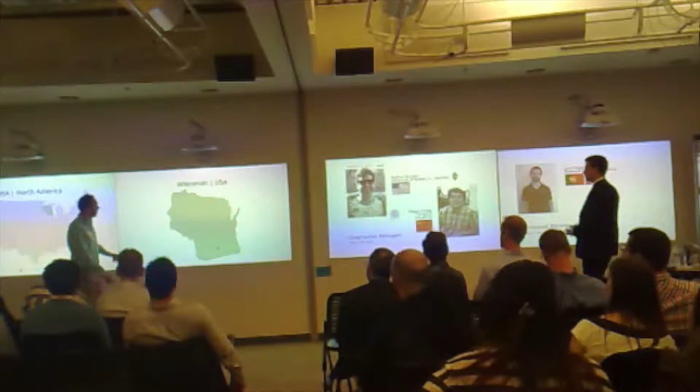So a few words about our site. It's located in the Midwest part of the US, in Wisconsin, in the city of Madison, which is also the capital city of the state. More specifically within Madison, the site is located on the north side of the University of Wisconsin's campus on the south shore of Lake Mendota.

Getting into more detail, we saw that from all 4 directions, there's something unique about our site. From the west, we have the Lakeshore Path. The north, we have the picturesque Lake Mendota. From the east, we have the waterfront, including the Memorial Union Terrace. And from the south, we have Muir Woods, the Hill, and College Library.

Bryce? Bryce, you there? Can everybody hear me? Yes. All right, sorry, I lost internet.

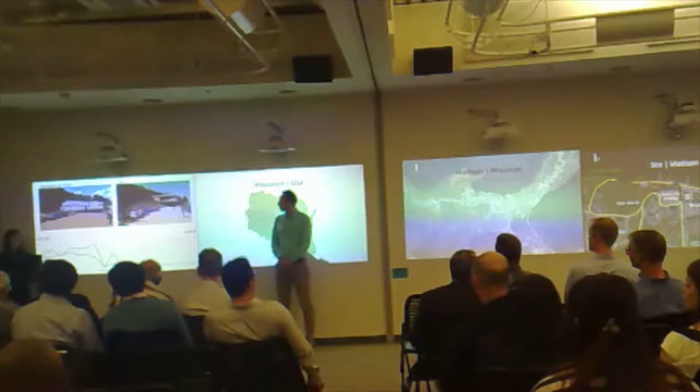Okay, so as a team, we've had an interesting road to our final product, to say the least. Although 7 different building designs and countless iterations of floor plans are a good measure of the amount of work that we have produced, they are not good measures of team process and growth. When looking at the communication history of our group, we saw a very unique correlation between the amount of communication and the quality of our design.

The first design, Containers of Power, was one that we came up with at the kickoff, but was strictly an architectural idea in which we were thinking about sustainable design. This idea was quickly dismissed when we tried to fit the program within the restricted size of shipping containers and had no chance of working.

Next was the Cave, and as you can see from the timeline, our communication was at an all-time low. This is because we were simply working in our silos and communicating privately within disciplines rather than publicly across disciplines. It was a produce and react rather than a collaborate throughout. A couple more iterations in this space, and we finally realized that we needed to change. So midway through the quarter, we had a pivot.

We conducted a brainstorming session with our team and came up with a collective decision to use transition as our next big idea. In this design, we really wanted to achieve transition throughout all disciplines. Examples included a transitioning facade, a hybrid steel timber structure, innovative MEP systems, and a proactive construction process rather than a reactive one. As you can see, our communication was at an all-time high. This was a great step in the right direction, but again, we wanted to achieve more.

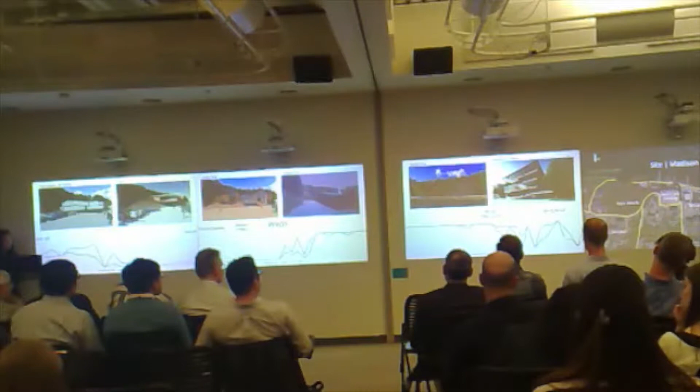Because of its popularity in the earlier stages of the class and its inherent integration characteristic, we decided to start over with Shan Shui. This integrated building design is what we are proposing today and was produced in what we feel was a fully transparent and collaborative cyber working environment.

So we wanted to go back to our site real quick because we have a lot fewer hazards than other sites do in this program. Because of that, we wanted to focus on the user environment in all 4 seasons that happen in Madison. The fall with the trees changing colors and football season upon us. With winter, with snowfall and freezing temperatures, we want to focus on thermal insulation and also allowing the building to look architecturally sound in the snow.

Moving on to spring, while trees and flowers are blossoming in Madison, we want to make sure that our building does not take away from the beautiful background it has. And finally, in the summer, when Madison is most vibrant and exciting, we want to make sure our building does not take away from the waterfront that it is placed on.

As said before, in this place we experience a humid continental environment, and the main seasons we have focused on were the spring, where we have most of the wind coming from the south, and also winter and summer, where we have wind mostly coming from the northwest. Also, we have a low sun path in general, especially during winter, but during summer we have good light

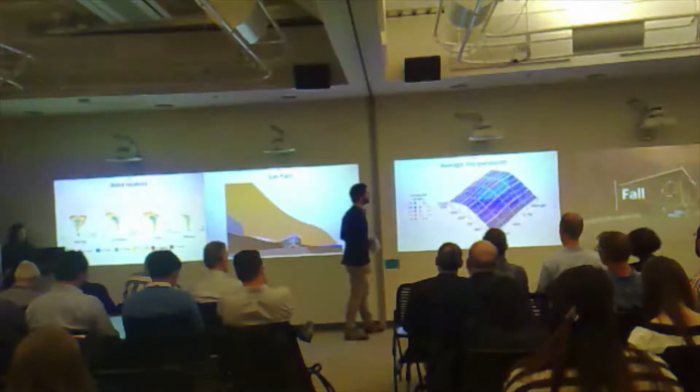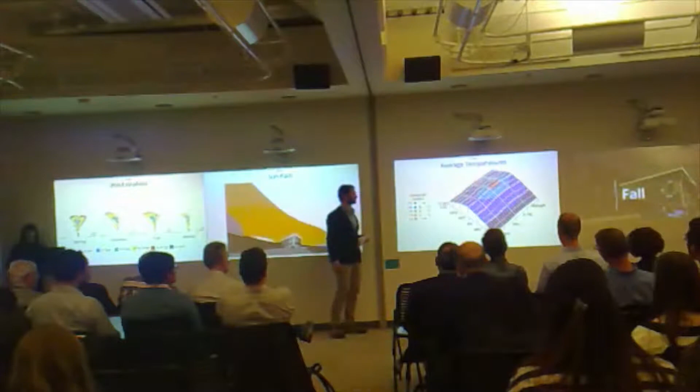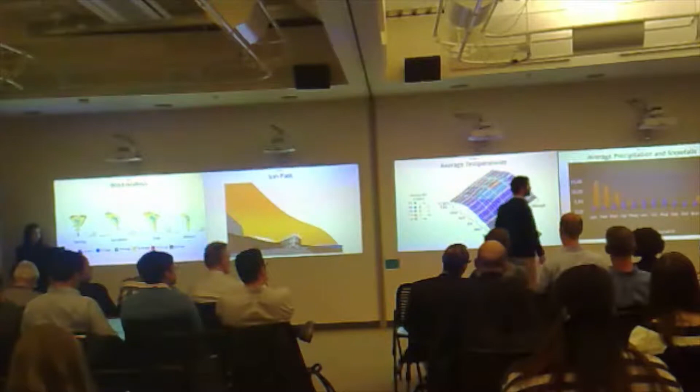conditions. The average temperatures, or let's start with the maximum and the minimum. We can have real extremes in our building site. It can range from 85 degrees to -10, but most of the time it will be between 32 and 68. Also, we have heavy snowfall, especially during winter. We also have rain throughout the year, but especially in the summer period.

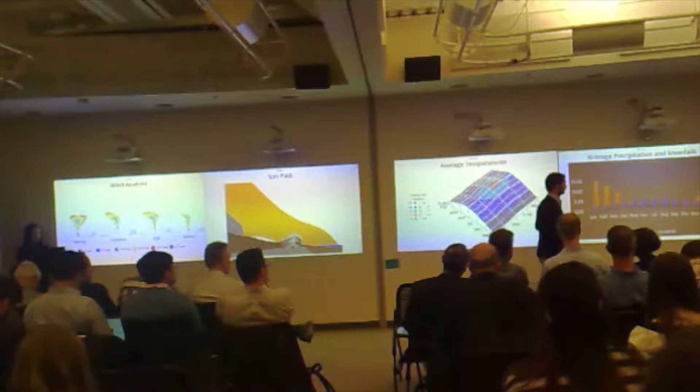While we don't have hurricanes or earthquakes or anything like that, our site still has its challenges, its hazards, and its opportunities. The challenge our teams faced directly was a very tight site, about 3 times the size of our building footprint. The way we dealt with that was constant communication between the architects and the CMs. The diurnal temperature variation between summer and winter not only affected the architectural, the MEP, and the structural engineering, but also the construction management for the safety of our workers.

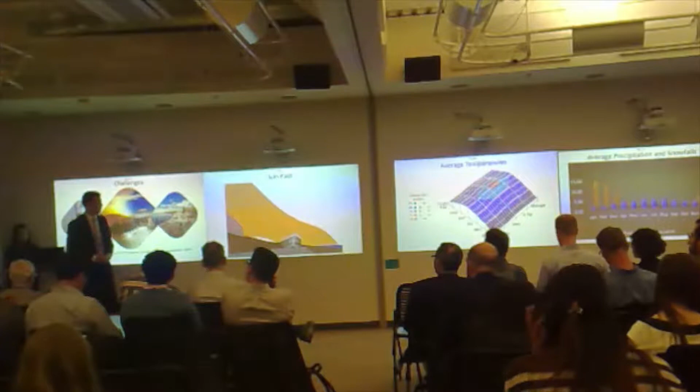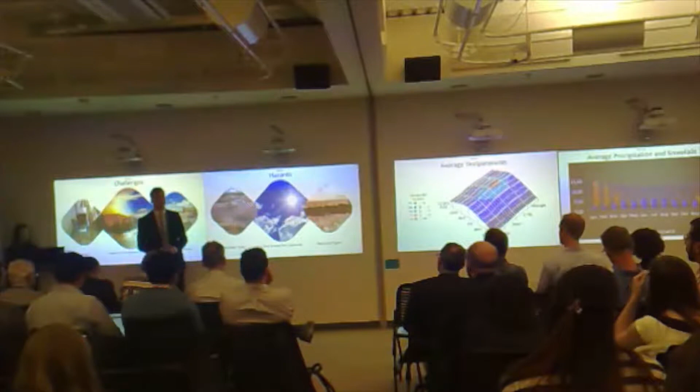The last big challenge we saw was pedestrian traffic with the lakeshore path. Keeping this path open throughout the construction process and after the building is open was a huge priority for us. The hazards we faced, as I said, were not as extreme as other teams, but a high water table, low overall sun exposure, and the weak soil types below our building definitely influenced our designs.

In terms of our opportunities, the big one we had was Lake Mendota, one of the most picturesque lakes in Wisconsin. This lake is used 365 days a year, whether it's for sailing or snowball fights, and it's always a big architectural element within the city. Some further opportunities that we saw when looking into our building designs was the outdoor culture of Madison. It does not matter what the temperature or the weather is, people love spending time outside.

Muir Woods to our west and southwest also allowed us a very natural feeling environment around our building. And Memorial Terrace to the east was a good counter with urban culture, sitting on a terrace right by the lake. The last thing we wanted to talk about was the Wisconsin Idea, which is an idea held by the University of Wisconsin that education should influence people's lives beyond the boundaries of the classroom within the state. We really took this idea to heart, especially in the construction management portion, in order to focus our material locations in the state and support the economies of the state.

So our architectural concept is 山水 (shan shui). Try to pronounce it if you want. 山水. Yes. Literally, it means mountain and water. But in the view of Chinese poets, it means the wonderful, ideal space. As a building, 山水 means harmony with nature. Live in nature, do not destroy it, be sustainable. By the way, this word 山水 in Chinese is sometimes used to describe two friends working together, just like our team.

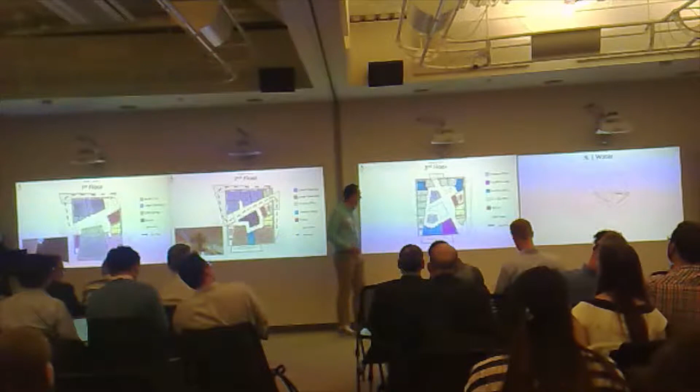We continue our journey through the building. We go out on the north facade, make a U-turn, and then we reach the top level, which is on the west side, dedicated for the administration. And over there, we have a cafe with lunch for the students and for the faculty.

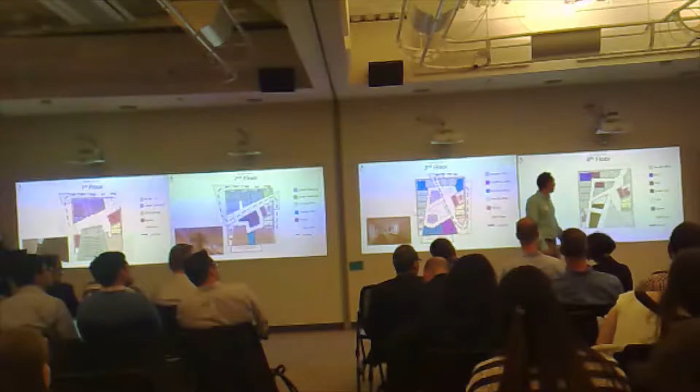So we have 3 steps of the integration between the users and the building. This is also the place where we end our journey and we enter the new routes. This was the hiking through the mountain. When we go down, we will have the water flowing down to Lake Mendota.

Another important aspect for our team is the collaboration between architects and MEP. The main focus for us at the beginning was daylight. Because it's a university building, we had to focus on good lighting conditions. So most of the offices are located on the north facade with a picturesque view of Lake Mendota.

We have more than 70% of the building area above 250 lux, which is almost enough to have good lectures and a good environment. We also performed a Rhino Grasshopper study about glare, and we noticed that especially during the summertime, we will have a fair amount of glare on our west facade, as we can see in these 2 pictures.

And in order to deal with that, we are installing roll-up shadings that will automatically open and close according to the necessities. Also, we will have natural ventilation, not only through the auditorium, with the help of the stack effect that we will experience in the shaft.

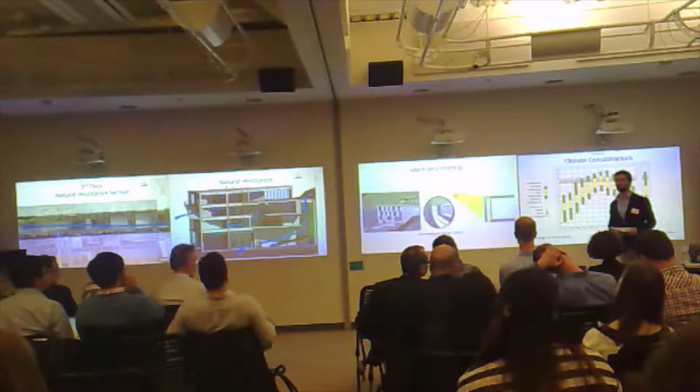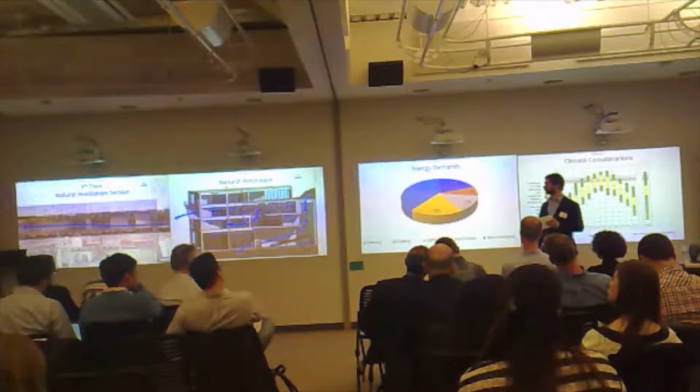Returning to the climate conditions, we noticed that if we have a very compact design for our building, and if we reduce as much as possible the thermal losses, we will get the best results possible. So after calculating the energy demands of our building, we figured out that most energy we will need will be in heating and ventilation together. This will happen because we have the heating and cooling systems going through air.

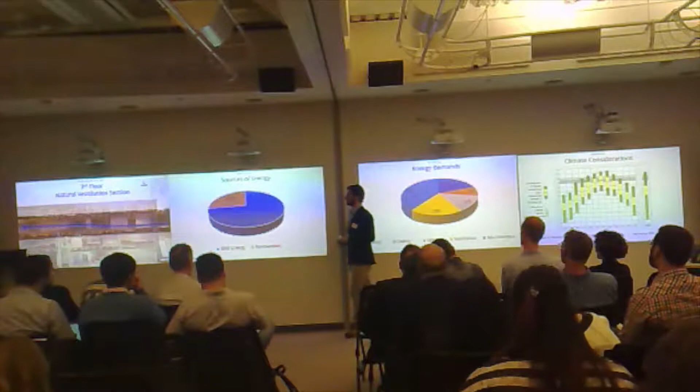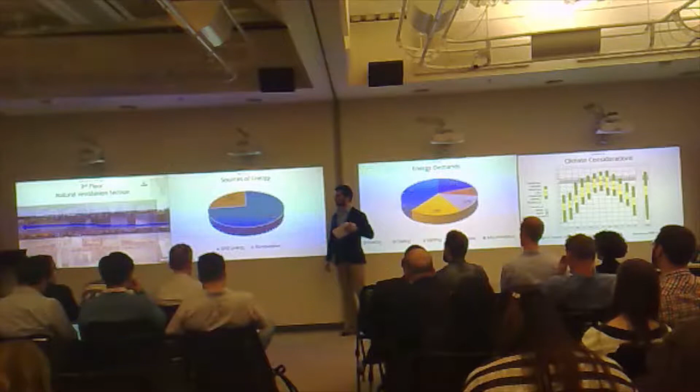The miscellaneous is all the computers and all the systems we have, server rooms and so on in our building. After all, in Madison, people rely too much on fossil fuels, such as the coal generation plant, and also in Wisconsin there is a big use of coal. So we managed to use renewables for 26% of our total demand to satisfy our needs.

And this is the total system scheme. It came naturally, as we started to study and know our systems better. Our primary systems will be the cogeneration facility, PV panels, photovoltaic panels, solar collectors as well, and we will have earth tubes as well. For the secondary systems, we will have displacement ventilation and also regular ventilation.

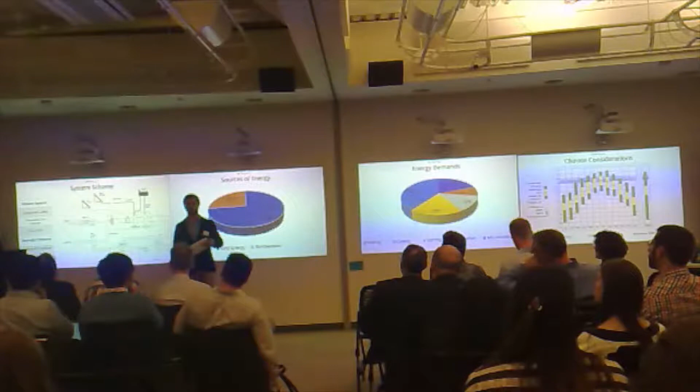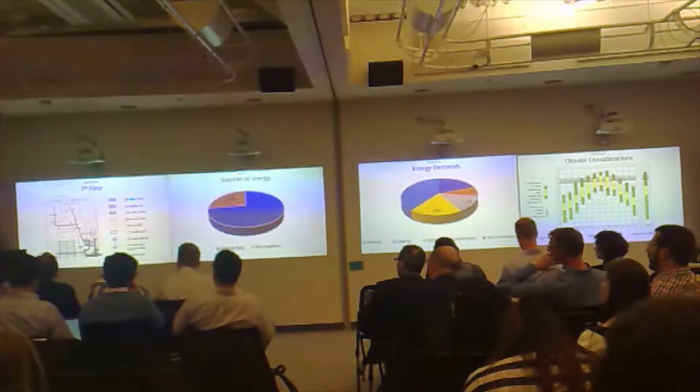The displacement ventilation we will use in the places where there is enough floor to ceiling height to have stratification. So it will be a study room that has a double floor and also an auditorium. So yeah, we try to merge our mechanical system as much as possible with the architecture and with the structure in order to get the best out of everything.

So on the first floor, we have our mechanical room in the southeast part of the building with the vertical shaft. Here, for the displacement ventilation we just talked about, we will have 2 holes in the slab so we can have ventilation from the floor.

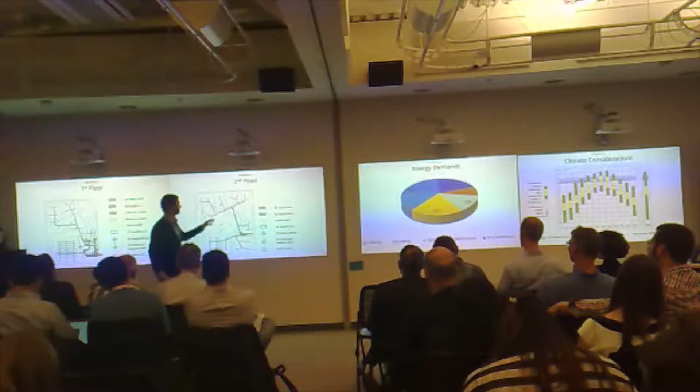And on the second floor, we will have the two ventilation grills on the floor, as we said before, and the VAV boxes are installed by areas and not for a specific room. This way, we can use rooms with the same characteristics with the same VAV box, so we will have the same kind of climate in the same kind of office or area.

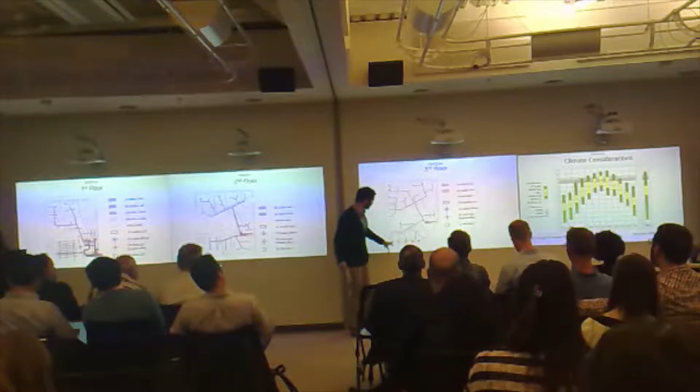On the third floor, the biggest highlight will be the air return grills in here, in this area. These air return grills will be the return system for our auditorium from the displacement ventilation in the shaft. Displacement ventilation will be the ventilation supply; the air return ducts will be really small because it will be functioning in the plenum, that's the area between the ceiling and the false ceiling.

On the fourth floor, the biggest highlight will be the air handling unit with the fan coil unit that can cool or heat up these areas because there is a lot of glazed area. So while we may need to cool down on the first floor, we may need to heat up on the fourth floor or vice versa.

So our procedure to make the air systems: we started out first with the air supply and the return air in a very typical way, and then we found out that it would take too much space. Then we tried to merge it with the structure, and we also found out that with glulam beams we cannot have big enough holes to accommodate our MEP ducting. So we used the plenum. We create a low pressure in the plenum in order to bring the air into the return system.

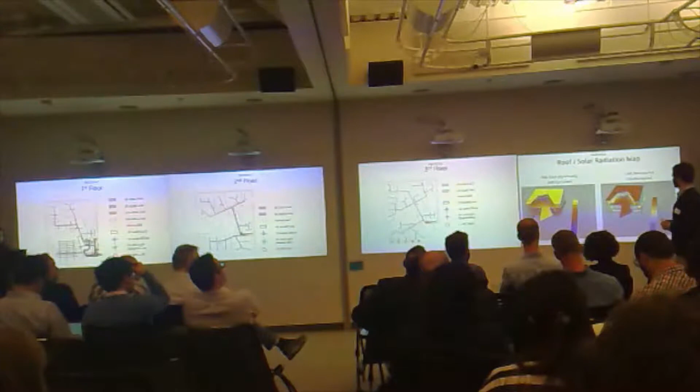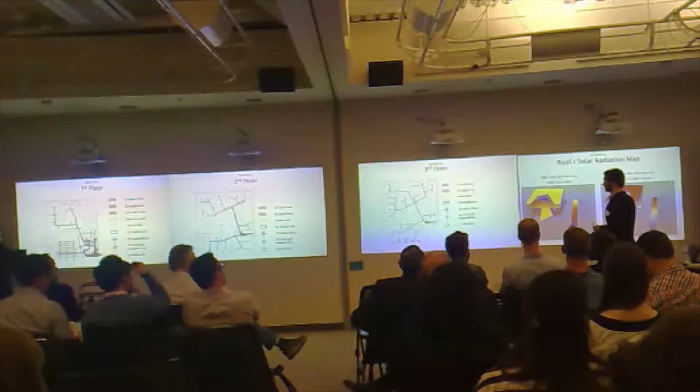About the renewables, we did again a simulation in Rhino Grasshopper. We tried to figure out how we can use the sun as much as possible, and it was the roof with the most hours and most energy hitting it. Then we decided to have photovoltaic panels and solar collectors.

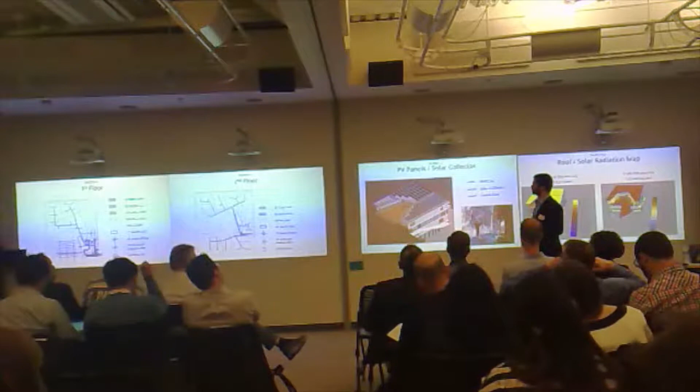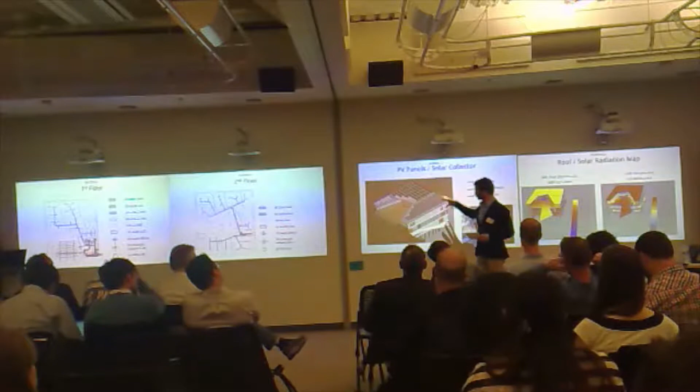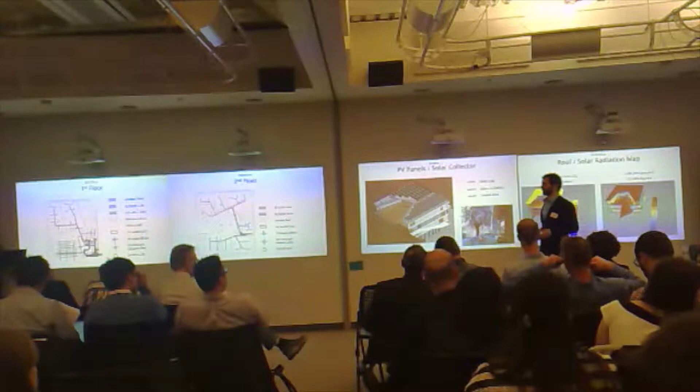The PV panels will be on the west side and solar collectors on the east side, close to the vertical shaft, and also an access area in blue for maintenance and these kinds of changes. We have to change the pitch of our solar panels twice a year in order to take more advantage of the sun, but also to prevent the snow from staying there. And that way we don't end up like John Nelson removing all the snow from his roof by hand.

So we managed to have most of the energy for heating from our solar devices. We cannot have all the energy from that because in the winter there will be too little sun to take advantage of and use all the potential of the system.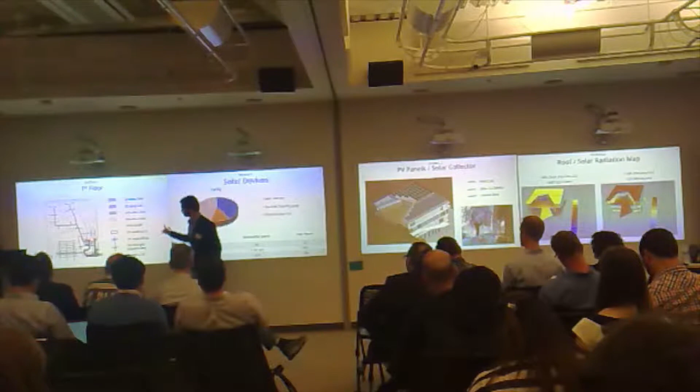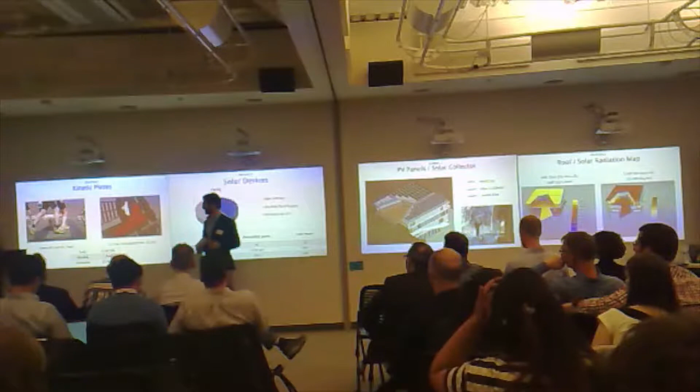We will also use kinetic plates. We will have 50 kinetic plates that harvest energy from the footfall in the entrance of the building, the place where more people will be passing by. In total, if 500 people pass through that area, we will get 340 watts. And now you tell me, yeah, that's a very low value, but it's enough to power a screen that will give real-time information about our building's sustainable data and our building's way of solving problems.

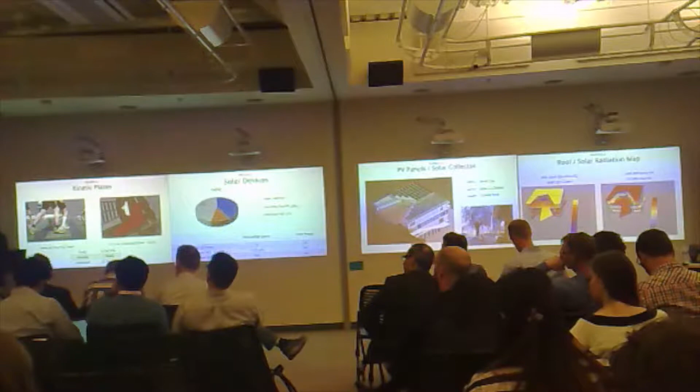We will also have earth tubes. The objective is to have ducts passing through the ground and use the energy from the earth to eliminate these peaks of air that are entering our air handling unit. We discovered also that in Wisconsin there is a LEED Platinum certified building that has exactly this system, and we are pretty happy to have the same.

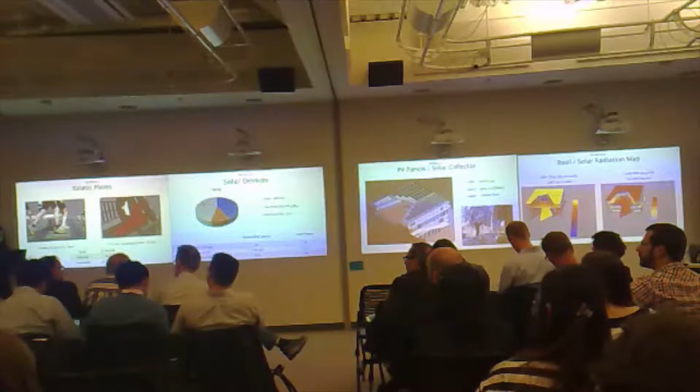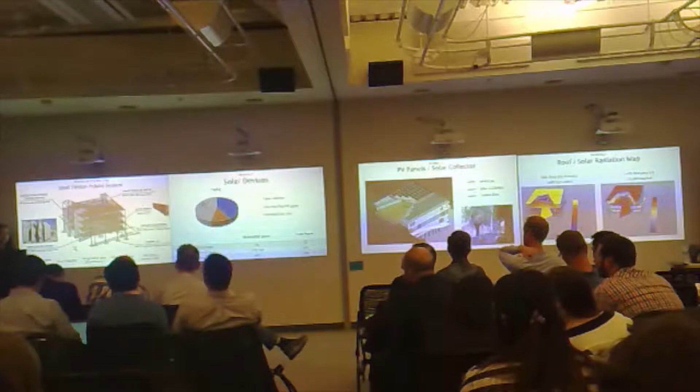So fly ash is one of the main byproducts of coal combustion, and in Wisconsin, the major energy resource is coal. So by using this high-volume fly ash concrete, we can definitely reduce the waste, and also reduce the carbon emission by like 60% compared to conventional concrete. So all of our materials are really sustainable, durable, and most importantly, integrate really well with the architectural vision and our beautiful site. We also make sure that the construction system is efficient by using prefabrication and panelized construction.

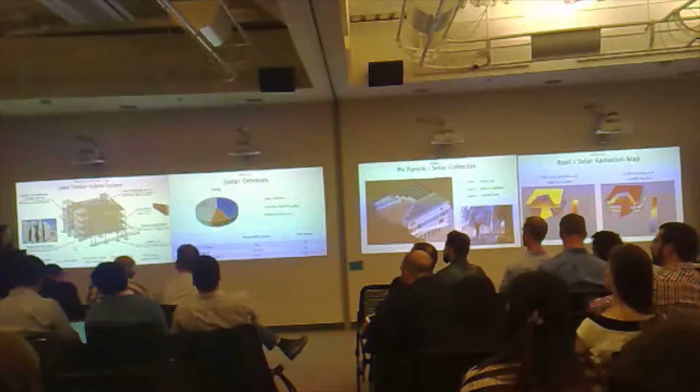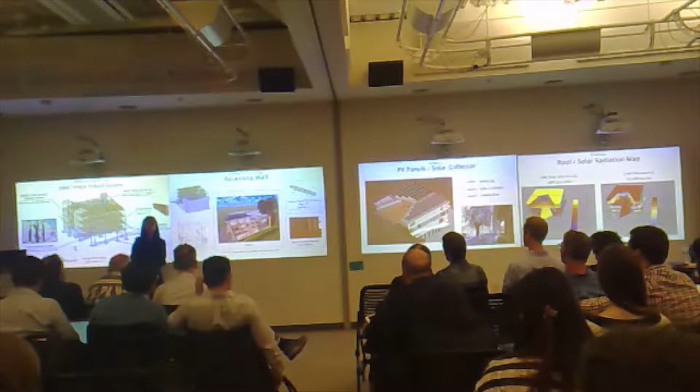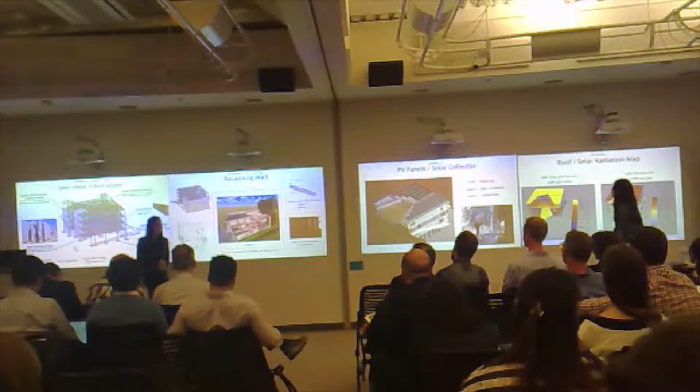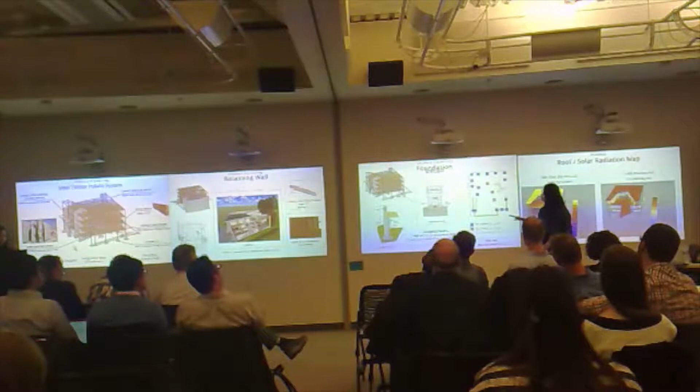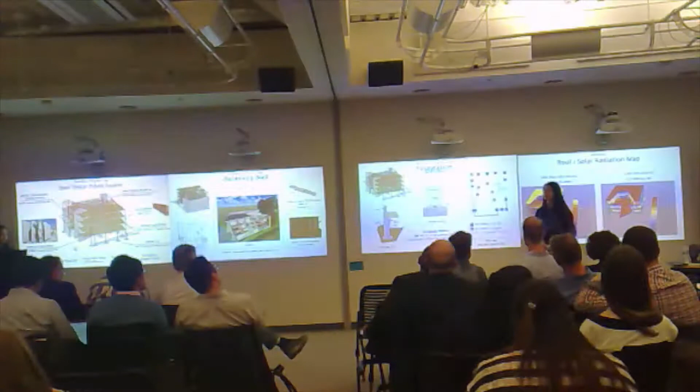For our foundation system, we're going to use isolated footings. But notice that during the winter, Madison will have a frost line that is 5 feet below the ground. So our perimeter footings will also be embedded 5 feet below, and the insulation will be provided on the outer side of the footings. We chose to use high volume fly ash concrete for all of our concrete components, including our footing system, our retaining walls, and concrete shear walls.

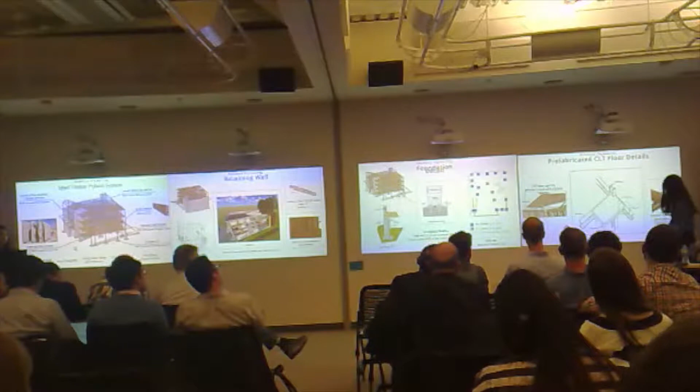As mentioned earlier, one of our main challenges is the tight site, and also Madison snow starts early in the winter. To make the construction process faster and easier, we decided to implement prefabrication and panelized construction. So we propose to use CLT floor panels prefabricated with glulam beams attached. So after the steel frame is in place, we can just install the floor plus beams. It is estimated that the prefabrication system is going to shorten the assembly time by about 3 weeks.

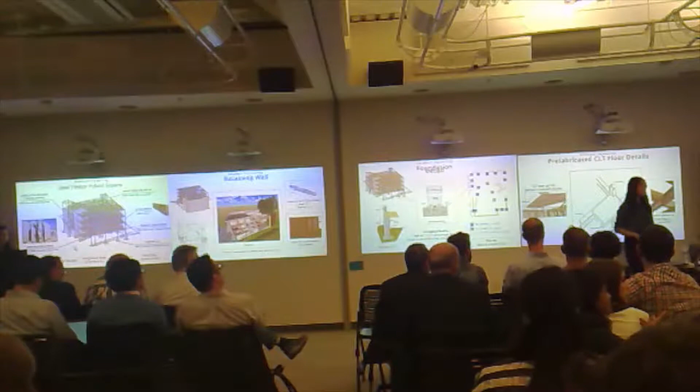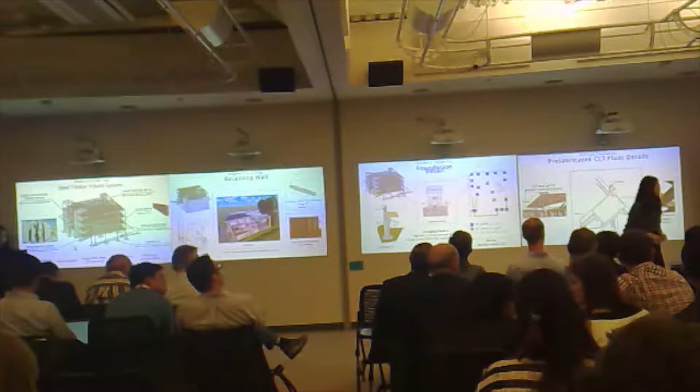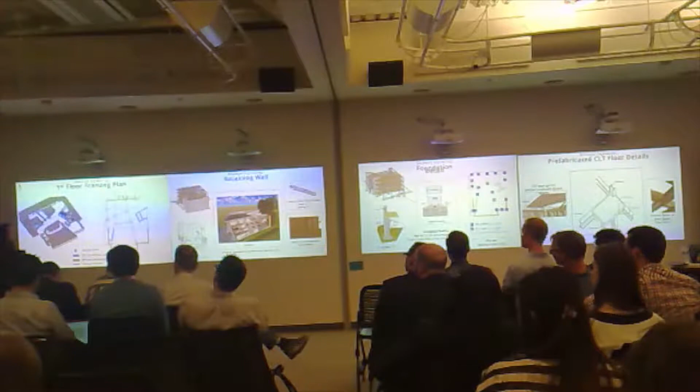As you can see here, our biggest challenge is actually providing a really irregular framing system to match the architectural concept. On each slide, if you look at the left-hand image, you can see how our structural system interacts with our architectural floor plan. Also notice that the spacing between our glulam beams is capped around 5 feet, because the max width you can fit onto a truck is like 10 feet. So effective spacing will ensure that a 10 feet wide CLT panel will have at least 2 glulam beams pre-assembled. And these are typical details included in our drawings.

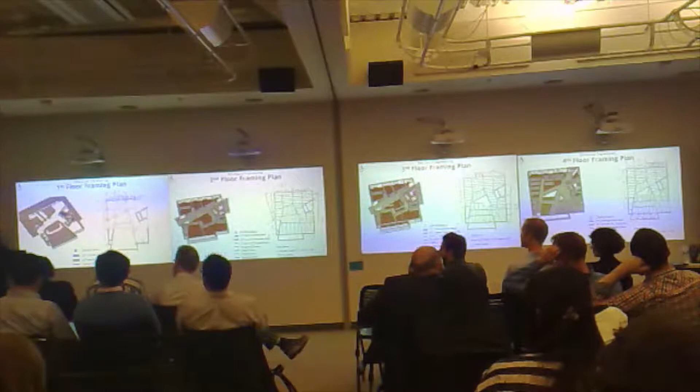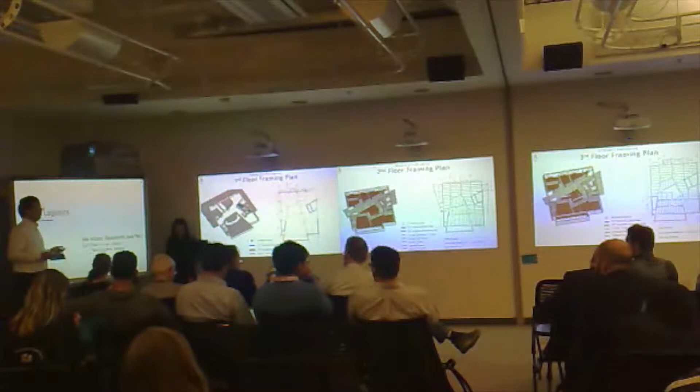For the construction management, Andy and I as CM want to focus on the challenges of our site. We want to use these challenges to directly influence our design. The first challenge of our site is limited accessibility. With a single small entrance on the east side of our site, it becomes crucial for us to use a singular path to avoid any crowded areas and sharp turns.

And to further our site accessibility, a detailed delivery plan will be used. GPS-based real-time tracking systems with our detailed delivery schedule will help us minimize the delays caused by site congestion.

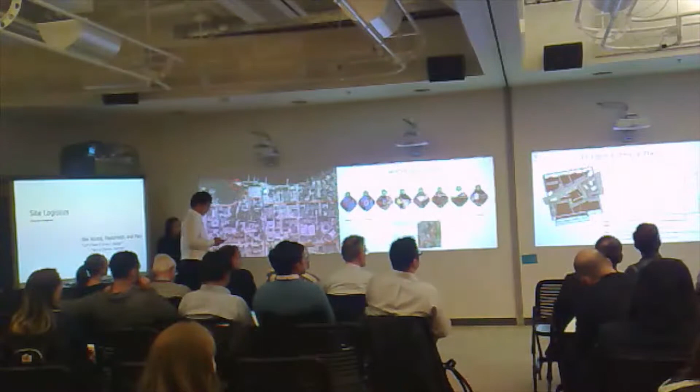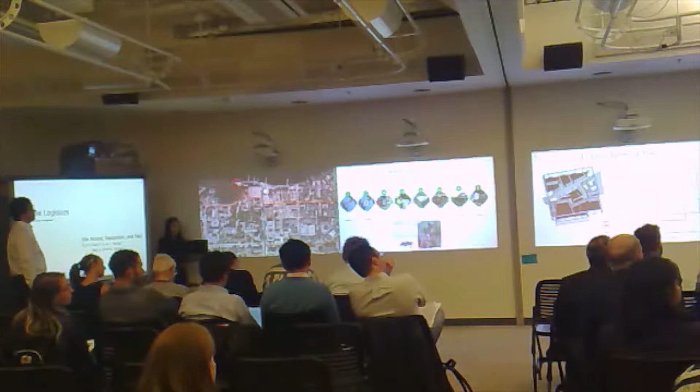In terms of our site logistics, because of how small our site is, about 150 feet wide by 200 feet long, a mobile crane with its square footprint became impractical due to issues getting to the west facade. So we had to go with a tower crane. Luckily, because of our steel and timber construction, our largest panels were well within the range of any basic tower crane. So we were able to focus more on the footprint size and erection time, and we came up with the Liebherr EC-B5 tower crane.

Some other equipment we use on site: due to the large amount of excavation from embedding this structure into the hill, we'll be using excavators and haulers to move the soil from the site. For our interiors, we'll be using forklifts, and for our facade, which we'll talk about later, we'll be using telehandlers to move our panelized construction up to the correct floor.

Our overall site plan had to stay simple because of how small our site was. Working with the architects, we put the footprint on the west side of the site, with the tower crane on the southeast portion of the footprint. This not only maximized the amount of space the tower crane can reach on the footprint, but also minimized the amount of crossover with the pedestrian walkway, which will stay open the entire time during construction.

Putting offices and toilets in the southeast corner of our site allows a second path behind the Water Resource Engineering building for workers in order to avoid crossover with trucks and crossover with the crane.

The second challenge of our site is site safety. As our site is very tight, collisions between workers and vehicles happen. So we decided to apply sensors like RFIDs on the equipment so that we can update the constant location information of the vehicles, and use this to make the management notice where equipment will be, to ensure safety.

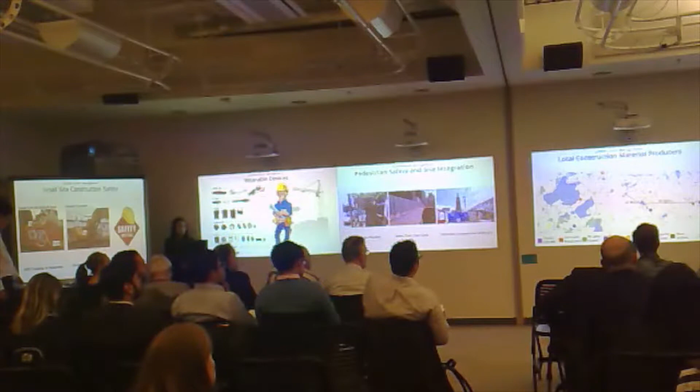Our TVD evolution is a bit of a mess because of how many iterations of our structure we actually had. It was a lot of general estimating because we never really got a finalized floor plan or structural system through our first few iterations. However, after our pivot around the 30th of March, we were able to start integrating our complicated Dynamo script, which allows for accurate takeoffs of what was going into the Revit models.

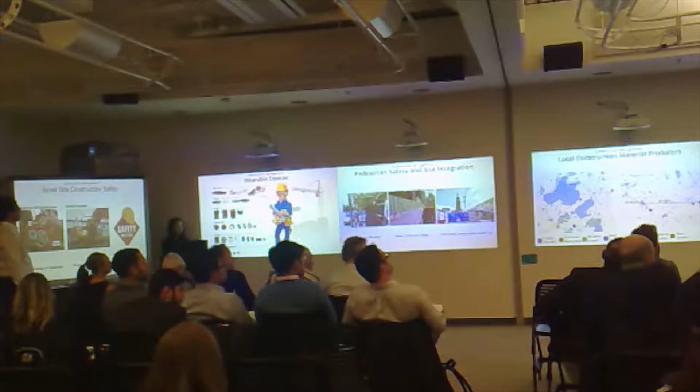Our final TVD estimation ended up about $400,000 below our target value, which ended up being $600,000 below our overall budget. The big takeaways from this are that our shell construction was still under budget, and because of the lack of a return air system, Joao was able to pay for his PV panels with that money and still stay under budget.

Bryce, you there? Bryce? Unmute. Everybody? Hello, Bryce. Hello. There we go. We can hear you now. Go ahead. Okay, Bryce, last chance. All right, can you hear me? There we go. Yeah. All right, sorry, that's bad.

Okay, so at this point, we have purposely left out one of the most important aspects of our building, and this is because we see this element as the pinnacle of our team's collaborative development over the last 15 weeks. The facade was a challenge from the beginning, but a challenge that we tackled as a team with all discipline inputs being heard, understood, and utilized in the final design.

Our building initially started with a fully glazed facade system. At the winter presentation, we got very positive feedback from the visitors on all major characteristics of the building except for the facade. So moving forward to the fishbowl a little over a week later, we decided to ask the question, what should the facade be? As you can see from the confusing screenshot of our Skype during the fishbowl, no real answers were given. A common theme was that it was possible to do, but we should probably think about it.

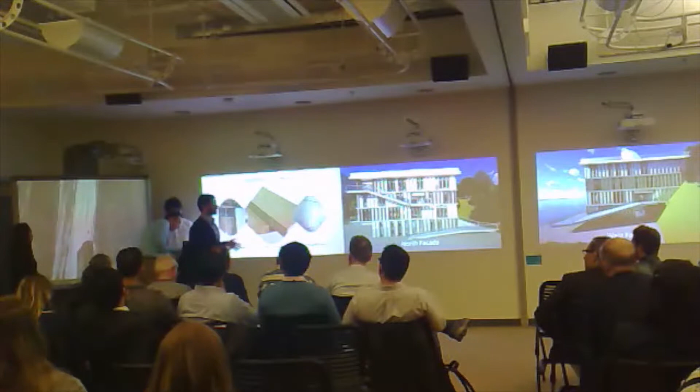Okay. Well designed. While designing our envelope, we have to keep in mind concepts such as air tightness, water tightness, insulation, and aesthetics.

So for our facade connection, we are going to use fiber reinforced polymer profile. The reason why we want to use this is because it provides really good thermal insulation. Also, it provides high moisture and corrosion resistance. So the FRP angle will be connected to our perimeter beam using the bolts, and then the facade panels will be attached to the angle.

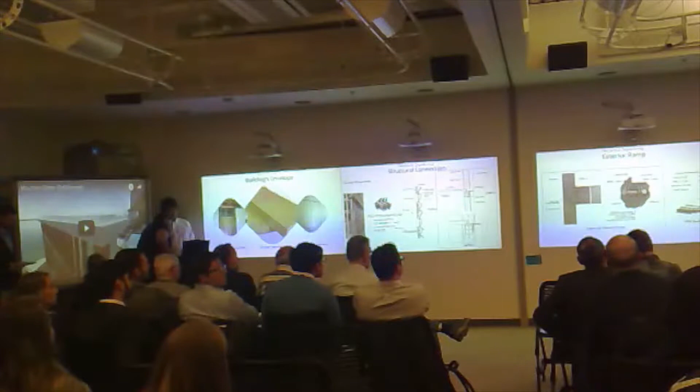So one of our building's distinct features is the cantilever ring that goes around our building. But unfortunately, it also creates a thermal bridging issue. So to better insulate our building, we decided to provide the thermal break that is made of fiberglass reinforced laminate composite to connect our cantilevered beam and the steel columns. So the thermal break manufacturer is based in the US, and this product has sufficient strength to ensure structural integrity.

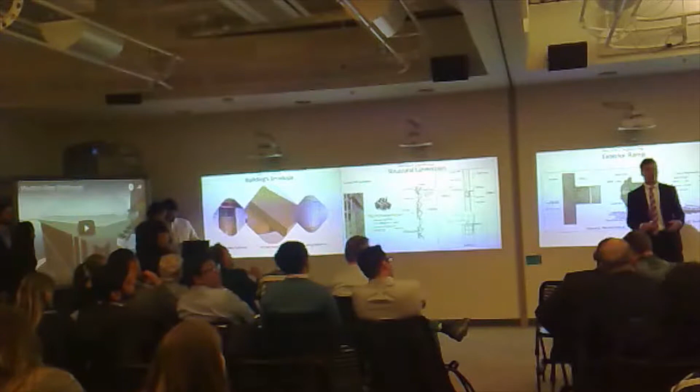Because the facade is naturally made of panels, it makes sense to try to prefab these panels in order to allow for easier construction and avoid congestion on our tiny site. So how we do that is we put our facade's 20 gauge steel sheet on top of the insulation and skeleton on all three sides that extend out to the site. By doing this off-site, it allows for easy transportation and easy installation once it arrives.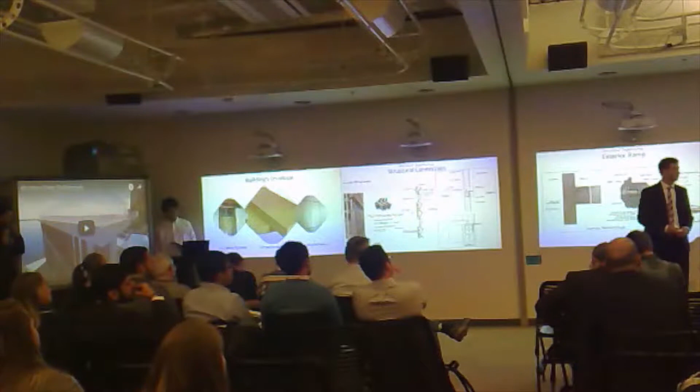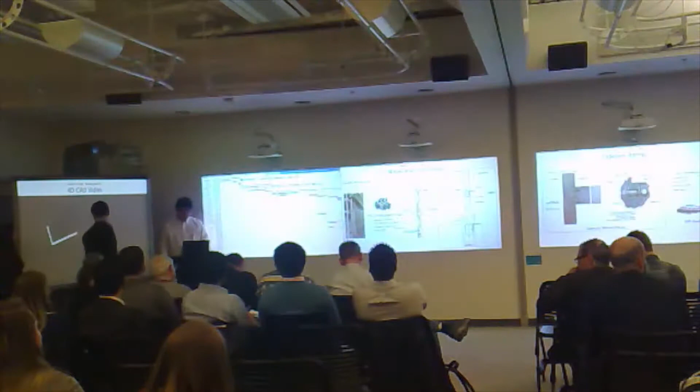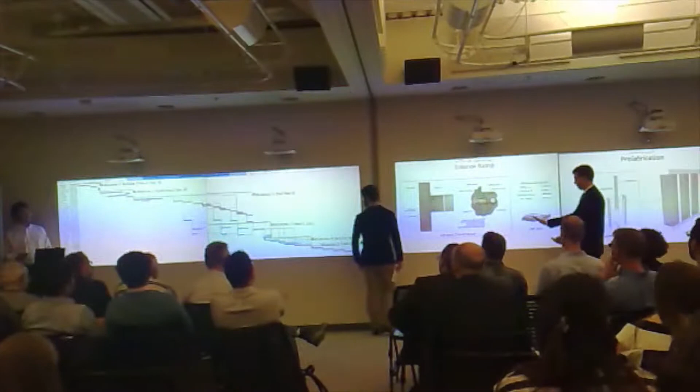Here is our detailed schedule and the 4D CAD showing how our building will be built up. All in all, our project will be finished by the end of July 2025. The whole duration of the project is 11 months. We optimize our schedule and save time by arranging parallel work as much as possible. For example, after finishing the columns, beams, and the floor of each floor, we will start the partitions of this floor as soon as possible to save time.

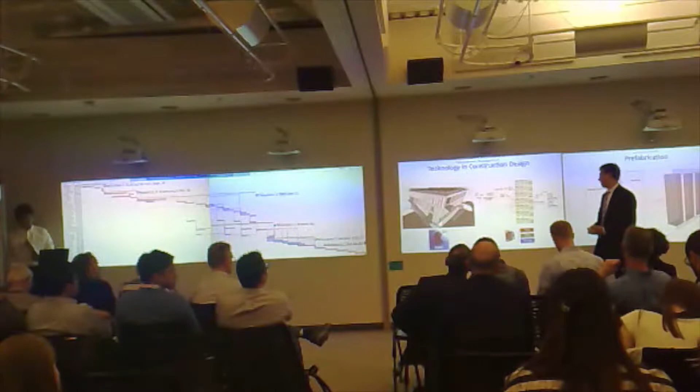Finalizing out the construction management portion of our project now that the full building has been developed. We used BIM 360 Glue as a technology to try to address clashes that we saw in the building, even though we tried using clash avoidance in Revit. The second thing we did was use a complicated Dynamo script to allow for automatic integration into Excel, and allows our TVDs, STVs, and ETABS model to automatically be updated.

Because of our site's natural elements that we have around it, the last thing we wanted to touch on was how we're going to avoid contamination of the lake and the forest. The biggest thing we're doing is sediment traps to the north of the footprint in order to catch any sediment or construction waste that may enter the lake. The second thing we looked into is avoiding erosion of the hill due to our excavation. By allowing for silt fencing and fiber rolls wherever necessary on the south side of the site, we can try to minimize the impact that we have on the hill.

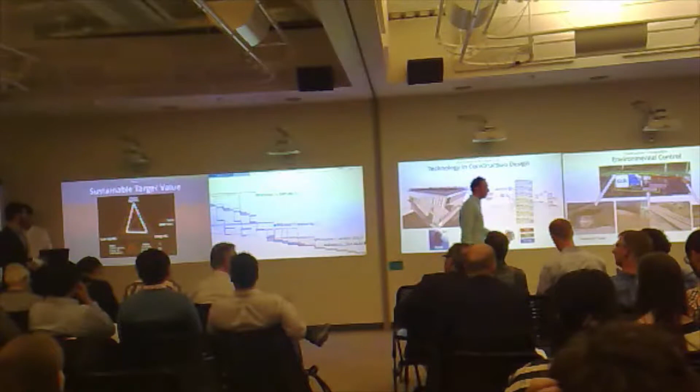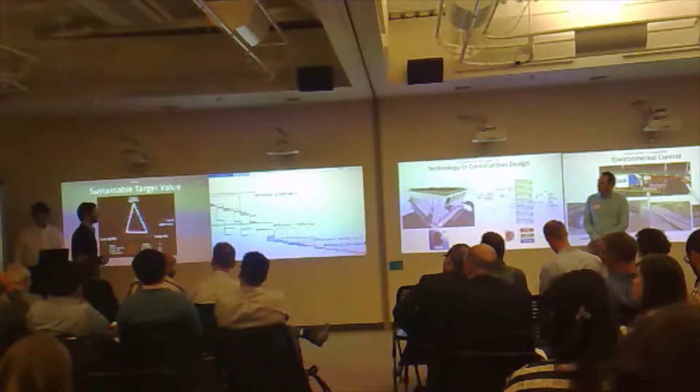The final thing we talked about was with our one entrance and one exit zone, we wanted to install a wheel wash to avoid any material escaping our site through truck wheels. In our STV, we ended up hitting the targets in water and energy, but in CO2, due to the use of the cogeneration system using natural gas, we weren't able to reach the carbon minimum.

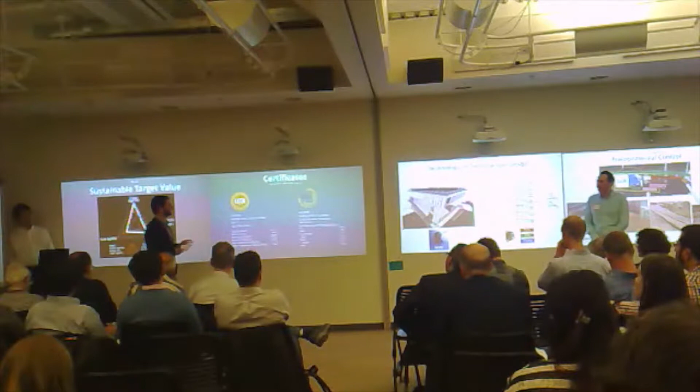But in another way, we have very, very good news. We used LEED and WELL certification, and LEED is more focused on building efficiency and WELL on user well-being, let's say. And we got gold in both. Similarly to other teams, we went through the past 10 years' challenges when it comes to sustainability. As this year's challenge is integration, this is our approach and our answer for the past years' challenges.

But what is more important for us, the integration is not only about the challenges, but also about the site and the people. And for us, we had a really difficult way to get here where we are today, as a team, not only as professionals, but also as friends. Thank you.

Hey Renata. Hello, yes, good to hear your voice again. Okay, you are in and out, right? Just keep in mind, we hear you with lots of... yeah, you are talking, but we cannot hear you. Oh, okay, gotcha. I was asking if you could move the mic closer to the mentors during the feedback so that I could hear them. Okay, we'll try. Thank you.

All right, mentors. Yes, Adam, Mike. Go ahead, Adam. All right, so first of all, really nice presentation. My first question is going to be about these kinetic panels. I see that they save just a very small amount of energy. But have you considered the cost of producing them and the energy spent for producing them? In the grand scheme of things, is it really the same with the production energy and cost spent on buying them? Wouldn't it be cheaper to just purchase the energy?